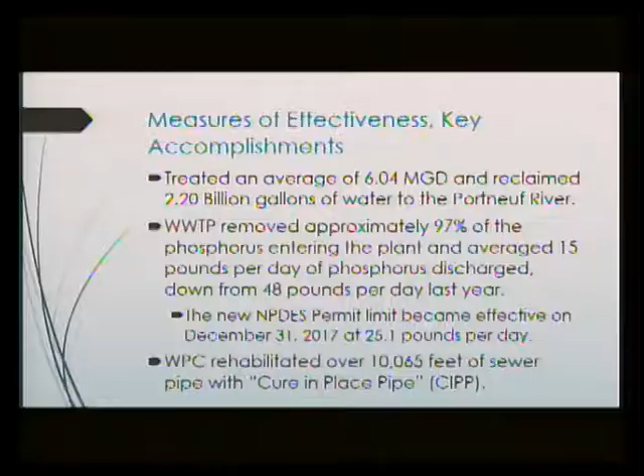We also relined over 10,000 feet of sewer pipe within the city.

We also have a pre-treatment program with the City of Pocatello where we monitor our significant industries such as Amy's Kitchen and others. They're also highly involved in inspecting all of the restaurants in town to make sure they comply with all of the grease regulations.

We are highly involved with educating residents through the Can the Grease program and the drug take-back program. That drug take-back program has been highly effective. We've collected over 1,500 pounds of medication that would otherwise be put in the landfill or dumped down the sewer drains.

Again, for the collection system, we cleaned over 236 miles of pipe, which is basically all of the pipe sizes from 8-inch down, plus several miles of the larger diameter collection system pipes.

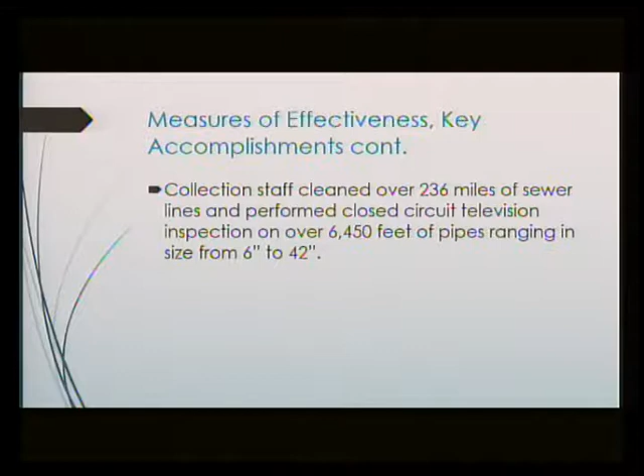Some of the key accomplishments from the phosphorus project we recently finished: we changed from chlorine disinfection to a UV disinfection system. It's a lot safer for the employees and very effective. We've had zero violations on our E. coli over the last year.

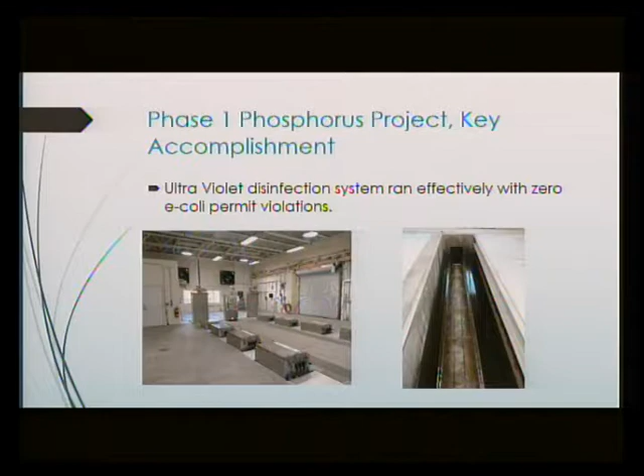Not only did we put that safety net of filters at the end of the process, we also improved our biological treatment of phosphorus by adding increased secondary treatment capacity, with new swing zones and new anaerobic zones.

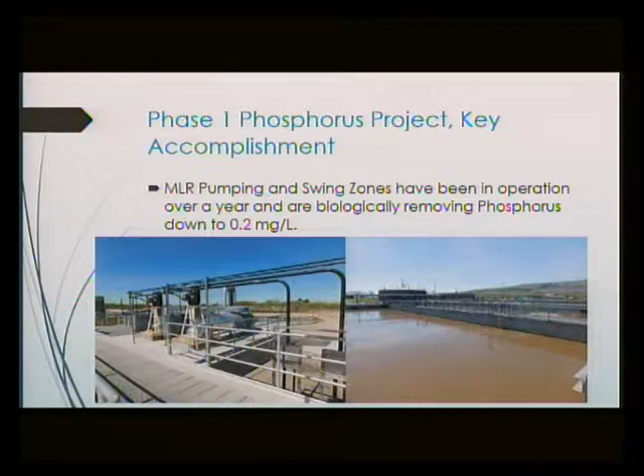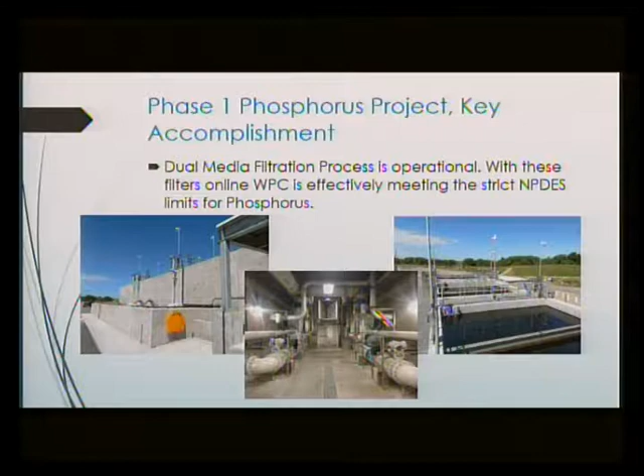Here is a slide highlighting that filter system at the end of our treatment plant, just before disinfection. With that, we should be able to handle any increases in the city as far as flow or other industries that come into town.

Some of the issues and concerns that we have at WPC: filling out our staff, finding a superintendent and a qualified mechanic welder, filling part-time positions as needed, and developing a succession plan.

Our plant staff is growing old. The numbers are slightly skewed as far as the average age—we hired a new individual who was 19 years old, so he brings down the average for the guys who are around 50. We do have a few young gentlemen out there who are valuable, but they're still learning the jobs. We need to make sure we have a plan to replace those older employees and all of that experience.

And again, as always, there's the aging infrastructure. We can only repair and replace so much. It is a continual battle to keep up on infrastructure.

Some more issues and concerns: the new NPDES permit. Our permit expired at the end of 2017. We did reapply in March. There is a transition for who will be the regulator over the City of Pocatello, from the Region 10 EPA to now the local state-run Idaho Department of Environmental Quality.

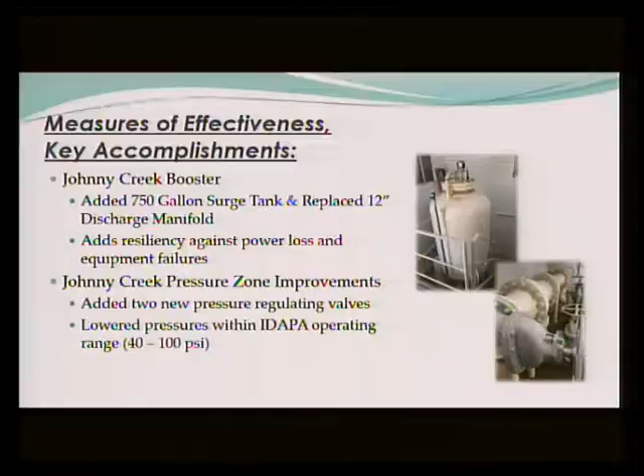So Justin, we're talking about the pressures. We've had some complaints about pressures in the Johnny Creek area. And so I just want to make it clear to everybody watching, this is a DEQ requirement that we're being put under to meet these pressure zones. And are we too low? I mean, is the pressure too low, or is it just like we remember when our sprinkler would shoot 400 feet opposed to 40?

No, it's actually the opposite. Our pressures were too high. We were experiencing anywhere between about 45 pounds all the way up to 200 psi. And so that's really hard on plumbing fixtures and pipes and leakage. With that high of pressure, you're actually doubling the amount of water that you're shooting out of a hose or a feature, so there's some waste of resources there as well.

We're lowering that right within the operating range and requirements of IDAPA codes. What is IDAPA? IDAPA, it's just the operating rules that we have to administer and operate our system within.

Like Justin said, they've got that requirement that your system needs to be within 40 and 100 psi. And so the Department of Environmental Quality has been working with us on a compliance agreement schedule to help us get our system within that code. There may be some areas that may be slightly outside of that, but they're working with us to help us try to get everything in compliance with IDAPA code.

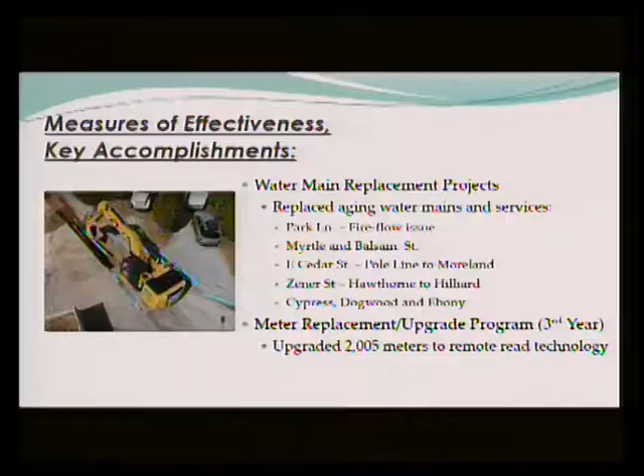So other accomplishments that we had, we continue our water main replacement project. We achieved about 2 miles of replacement this last year. These are some of the neighborhoods that we focused on. Some of them are due to fire flow concerns being too low with the flow rate.

We just went through a facility planning study, and they reevaluated our system based on growth and our current demand patterns to see where we might be out of line with the requirements. So we select based on not only just the age and condition of a main, but we also look at serviceability of areas, the impact if we had a potential failure in that area, and who it may impact. Say if it's a hospital or a large business or industry, what's the potential of that failure?

And so we rate those projects and try to fine tune them as best we can. Those are also areas where you've had a high rate of failure? Yes, that's one of the factors that goes into it. So it's not necessarily just based on age. We've got pipe that is nearly 100 years old that is still performing very well. Some of our pipe that was installed in the 50s is actually beginning to fail, and that's just based on some of the material changes they used at that time.

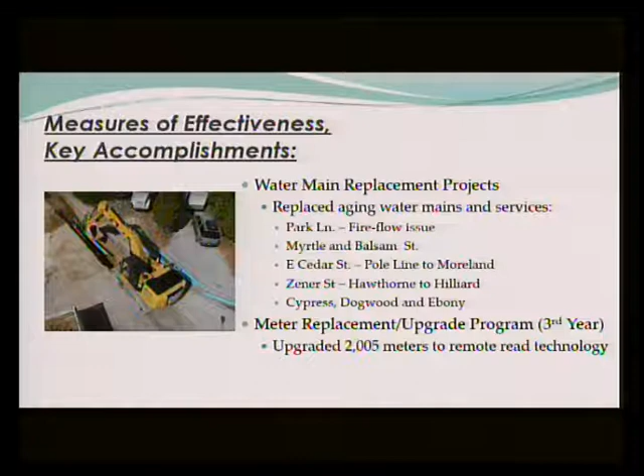So they're not building the pipe as thick as they did back in the early 1900s. There's a lot of factors that go into corrosion of pipe - soil conditions, corrosivity of the water, pressure surges, the pipe material itself. We had some debate in the past over ductile and other types. Have we determined a uniformity, or is it still up in the air relative to the types of pipes we're requiring to go into subdivisions?

Yeah, so we have opened our specifications to allow PVC pipe to be utilized in certain areas of town. On transmission lines, we still utilize ductile iron based on its properties surrounding pressure classes and other things, dealing with the surge effects that might happen in that line.

When you replace in those areas, are you replacing with comparable size piping? We are, yeah, or increasing the size due to meeting new fire flow demands or other conditions. Our minimum standard now is 8-inch. There are certain areas of town where it's an oddball size - they don't produce the 10-inch line as frequently, so we'll actually upsize to 12-inch because your cost comparison of fittings and other things is actually lower by increasing the size, and it allows for more growth and volume within the system as well.

So the last item on here is our meter replacement and upgrade program. We completed our 3rd year and upgraded about 2,000 meters. We're currently within our 4th year, and we'll finalize that within next year and be completely remote read meters or drive-by technology.